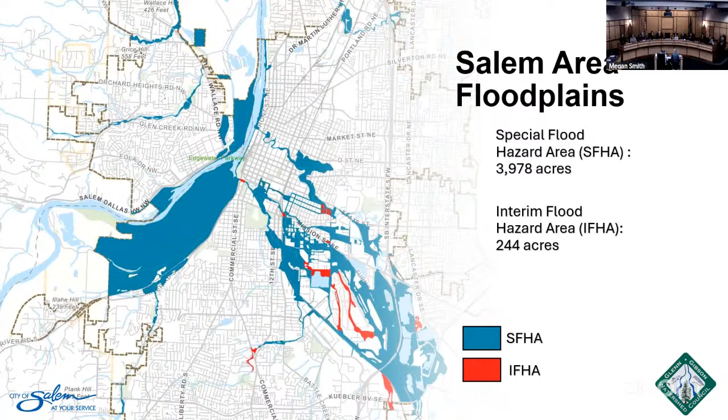We have a few additional IFHA study areas that are pending adoption. The majority of undeveloped SFHA is under public ownership within Minto Brown Island Park and Wallace Marine Park, equating to approximately 1,600 acres. We have approximately 800 acres of undeveloped land zoned for residential, mixed use, commercial, or industrial development.

All new development within the floodplain is required to obtain a floodplain development permit through the Development Services Division. These permits not only look at protection for structures, but also now require floodplain mitigation assessments that review development impacts to habitat for endangered species and to ensure those impacts are adequately mitigated.

When we talk about floodplains, we like to remind people that Salem has historically flooded over the years, and I've added some historical images here. The largest flood on the Willamette River of record was in 1861. The next significant flood occurred in 1890. In more recent years, we've seen flooding in the 1960s, 70s, 90s, 2012, and 2015.

In December of last year, we had an approximate 10-year flood event on Mill Creek, a flood event that has a 10% chance of occurring in any given year. This event impacted the State Street Corridor and the abutting residential neighborhood, though it was a relatively small event when you think about flooding in Salem holistically.

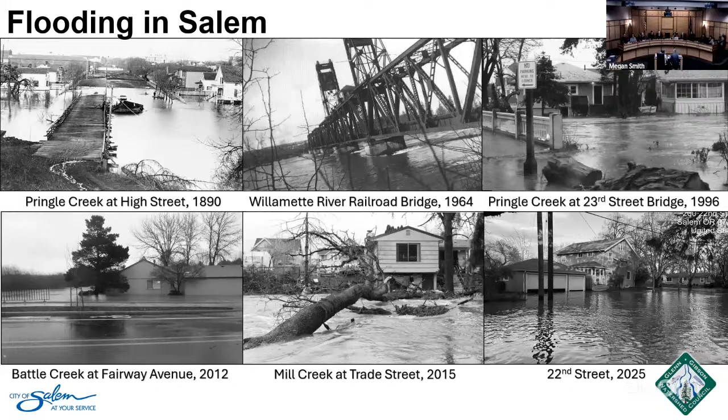Thank you very much, Laurel. I noticed that none of you are old enough to have experienced the 1964 flood. I was coming back from Corvallis at Oregon State University, and had to drive to Salem to cross the Willamette River to go east to Central Oregon where I lived.

So flooding does occur. It occurs naturally and occurs regularly. But there's a significant amount of adjustment following.

There's a recent lawsuit against the Federal Emergency Management Agency for not considering endangered species in the implementation of the National Flood Insurance Program. In Oregon, that lawsuit was started in 2009, dominantly by the Portland Audubon Society at the time, and there's been significant back and forth in the intervening years.

In 2010, the parties had a settlement agreement, and FEMA agreed to consult with the National Marine Fishery Service about the effects of implementing the National Flood Insurance Program and upgrade mapping, and look at the community rating system as it relates to encouragement or discouragement of development activity within floodplains.

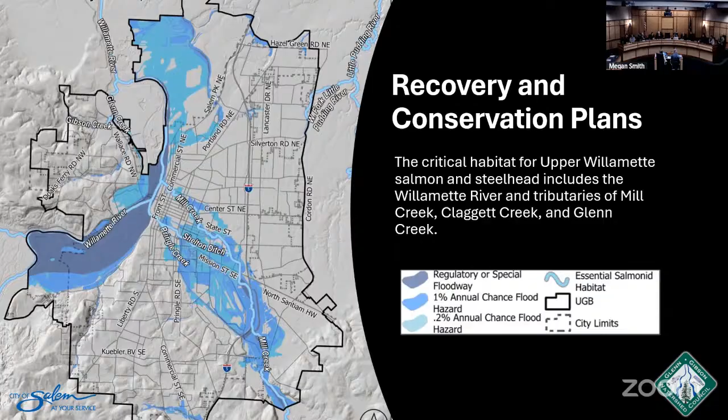It's important to recognize there's a broad variety of floodplain functions. Floodplains not only store water during high water times, but have a significant suite of functions - not just hazard reduction, but significant ecological values. Riparian forests are significantly important for a broad variety of aquatic and semi-aquatic animals and plants.

The functions that have been dominantly focused on through the regulatory process are flood storage, water quality, and vegetation. The focus on flood storage relates to loss of fish access, because when floodplains flood, juvenile fish utilize those areas, so they stay in place and don't get flushed out of the system - they feed in those areas. For water quality, the dominant effect is usually from impervious surfaces - that's one of the real struggles in urban areas, the dominance of impervious surfaces, so reducing that is really important.

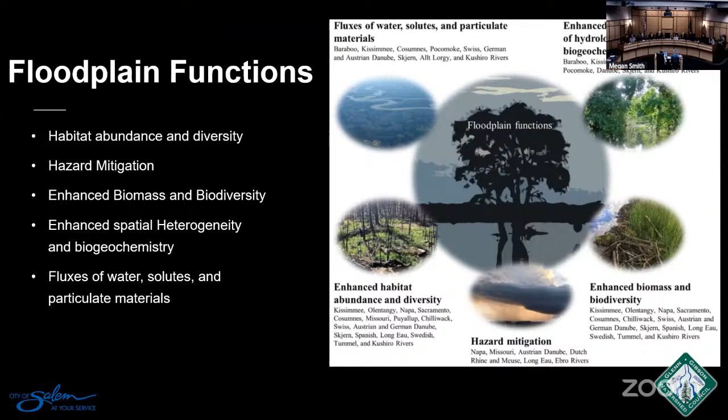And vegetation - there's a significant effort to maintain some sort of native cover on these floodplain habitats. So what we did was identify from significant literature a number of restoration activities, and if you look through the documents there's a whole variety of them, some of which the city is already doing.

The management of the Minto Conservation Area by replanting or reforesting the floodplain is one of the significant activities, particularly as the information about the number of acres in floodplain are dominated by Minto Brown Island. The reforestation that's occurred in that area is really important.

The control of Ludwigia, an invasive species in the backwater sloughs of Oxbow Slough and Willamette Slough - that's where the city cooperated with Willamette Riverkeeper to eliminate it - is an ongoing restoration activity.

The plan includes removal of barriers in Mill Creek, looking at removal of the dam on Penitentiary Ditch, looking at an alternative for Waller Dam where Mill Creek and Shelton Ditch interact, and looking at gravel pit reclamation for the possibility of creating habitat for northwestern pond turtle.

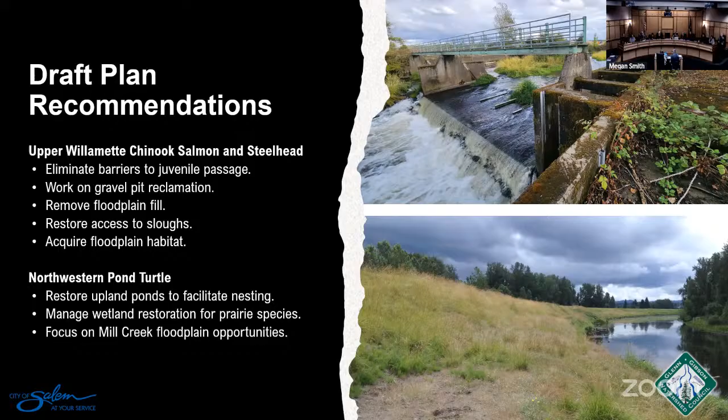So there's a list of a significant number of activities identified as ongoing, near term, and longer term, and we think they can have an effect on the species we're concerned with in the plan. I'll let Laurel finish as it relates to the floodplain management program that the city runs.

So briefly, I just wanted to talk on the city's floodplain management plan and program. We do have an adopted floodplain management plan that provides high-level guidance as to what a floodplain is, what its natural functions are, some of the history of flooding in Salem. It also provides action items for our floodplain management program.

It's reviewed annually and then goes through a full update every 5 years. We do have a floodplain management plan committee, and it goes through council annually and through those 5-year updates. Our most recent plan was adopted in 2023 and contains 43 total action items. They vary from very specific items that further protect people and structures, but also includes things like public information and messaging, stormwater standards to enhance water quality, and then other incentives for floodplain restoration.

There are 2 specific action items relating to the preparation of these plans specifically that we're talking about tonight. Those actions call for preparation of the floodplain species assessment and the natural floodplain functions plan in accordance with the CRS and federal guidance.

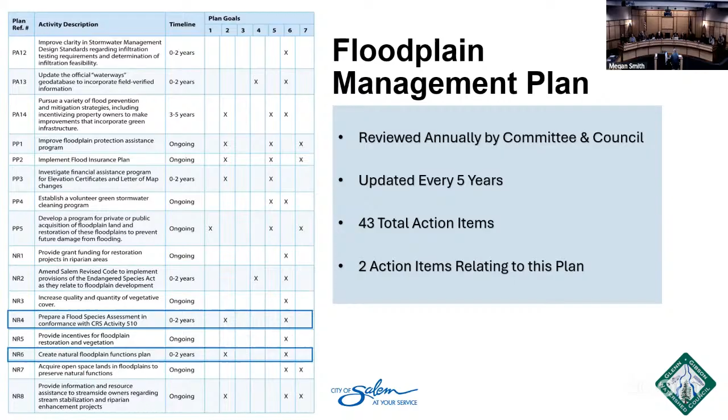And then I quickly wanted to talk about the community rating system program, which Ken and I have both mentioned. The CRS program is a voluntary program which the city is an active participant in. It recognizes and encourages community floodplain management activities that exceed national minimum standards. The CRS program recognizes the community's effort to reduce flood risk, facilitate accurate insurance ratings, promote awareness of flood risk and insurance requirements, and also the preservation of natural and beneficial floodplain functions.

I've listed a few examples here on the screen of management activities that the city currently receives credit for under this program. Based on all of the activities that we do annually, we have a Class 3 rating, which equates to a 35% discount on flood insurance premiums for FEMA-backed programs. In Oregon, Salem is the only Class 3 community, and across the country, there are fewer than 25 communities that have a Class 3 or higher rating.

So we always just like to put a little plug-in for the CRS program. It really reflects that our floodplain management program goes well above the minimum standards, and adoption and implementation of this plan will also be an activity that it's credited towards further discounts, potentially at our next annual verification visit.

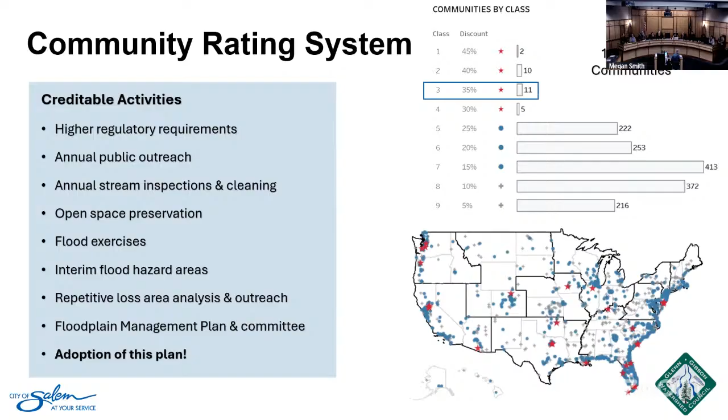Thank you for allowing us to present this evening. Ken and I can take any questions that you guys have.

Well, thank you for that. It was definitely a lot and interesting reading as we were preparing for tonight. And I know for myself, I'm very pleased that we're being proactive in taking these steps and pushing for the voluntary program. Any questions from the commissioners?

Commissioner Heller? Or not, well, I'll speak up.

Anyway, I wanted to thank you, and I've expanded my vocabulary from reading this. And it's excellent. It's just fascinating. And I just want to thank you for doing all this effort.

I will say most of the thanks should go to Ken. He was really instrumental in drafting this plan, and we really appreciate it.

This is actually a complex issue, and early on, as we were developing the floodplain assessment, we met with many of the neighborhood associations and tried to raise awareness and develop some brochures and tried to bring awareness to it. But that's hard to do in the summertime. People don't think about flooding in June and July and August, but we did have some receptive folks in the neighborhoods who were interested in at least finding out what the floodplains are and what the importance of floodplains is.

I thought there was something around 800 acres of undeveloped floodplain. And how does that 800 acres of floodplain... let's go back and look at the ownership of that first. We've discussed this a few times in the Planning Commission and recently heard testimony related to floodplains or other environmentally significant lands related to the 2014 buildable lands inventory. So I'm very interested, and I think the buildable lands inventory may be a little out of date at this point, but it'd be interesting to take a look at the overlap between those 800 undeveloped acres and the buildable land inventory. Do we have any ability to have that conversation?

I would not have that information tonight, but that's something we could come back with at some point. So it looks like we have something like 450 to 480 acres of residential land in the floodplain. And is that mostly... do we know about where that is? Do we have any kind of concept of what we're talking about?

No, I mean, like Ken was explaining, a lot of our floodplains are not even hydrologically connected to a water body. There are a lot of overland flow areas. To do that mapping exercise is not something that we have specifically, that I have tonight. Okay.

My thought is it's helpful to be able to understand when we're talking about really buildable lands for residential areas. Also, perhaps you can explain a little bit about hydrologically connected. So if we have a floodplain that's not hydrologically connected to a stream or a river, does that floodplain have the same value as one that is hydrologically connected? Perhaps if we can have that conversation, that would be helpful.

It would be my opinion that isolated areas that flood within the urban context often don't have the same value as those areas that are directly connected to some sort of stream or other water body. There are a few isolated wetlands that are important, but they're relatively few and far between within the urban context.

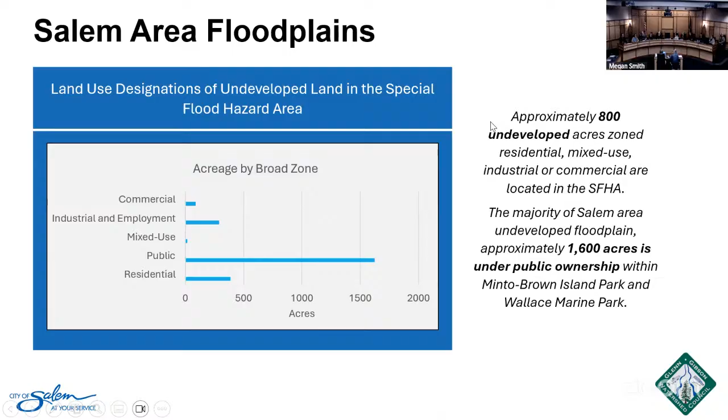My final comment is, how does the Oregon Conservation Strategy relate to this work? Oregon has identified a number of key species that aren't necessarily federally listed, but are species of importance for the state. One of the important things about these key species is that they are not yet endangered, so they don't have the same regulatory status, but they're indicator species. There's a greater opportunity to intervene at this point. Can you talk a little bit about how the Oregon Conservation Strategy relates to this discussion?

That's a very good point. The Oregon Conservation Strategy was adopted in December of last year, a few weeks ago. It includes the Willamette Valley, but it's very broad, and it's a scale issue. The species and threats they've identified are much more generic and a lot less specific than what was required for the development of a floodplain species plan.

So they focused more on, and you're correct, there are a broad range of species affected, but most of it's wet prairie species that have been affected by development, typically agricultural development, urban development, et cetera. So we did look at that. We did have Oregon Department of Fish and Wildlife review the document. They didn't have suggestions other than what we've adopted. But you're correct, the difficulty is scale.

They're looking at the entire Willamette Valley as an area. We're looking at a small subset of the Willamette Valley that is representative of a relatively minor portion, but a significant portion of the floodplain of the Willamette in the middle Willamette Reach. I don't know if that helps at all, but it covers it with a lot of words.

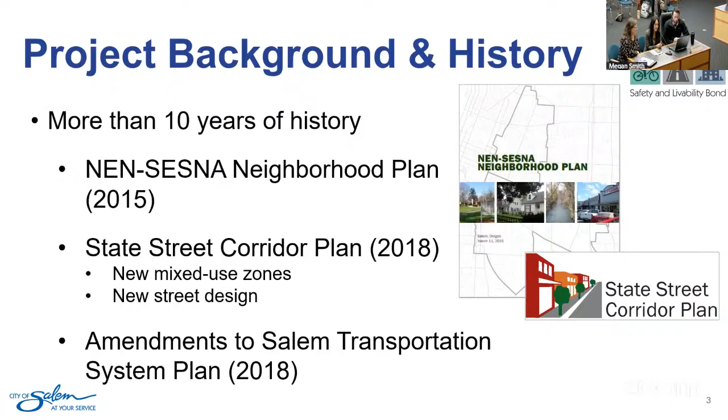Good evening. So once this was adopted into the plan, the first thing we needed to do was look for ways to implement, to fund different elements of it from the transportation side. We were fortunate to be able to apply for and receive funds for a number of spot improvements.

One was the 25th Street at State Street intersection. That project was just completed this summer. It included a new signal, an island for pedestrians, and reconfiguring that intersection.

The second is an enhanced pedestrian crossing, which will be constructed in 2026 on State Street by 21st Street. It will be one of the flashing beacon crossings.

Then, the focus of tonight is the 12th to 17th Street section, which was included in the 2022 Safety and Livability Bond Measure. That's the big project that we have funding for.

There's still more that will need to be done. Once this project is complete, we will have continuous bike connections all the way from West Salem to and through this corridor, connecting to 17th Street.

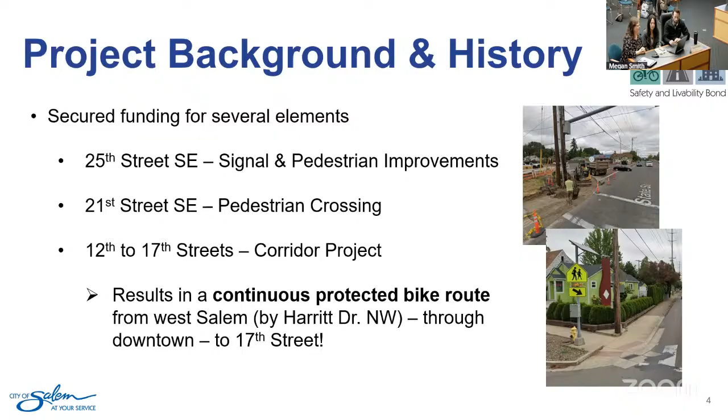This map here shows the entire corridor from 12th Street out to 25th Street. The portion on the west, from 12th to 17th, is the portion that Josh will be going into more detail on that we have funding for. The portion highlighted there in yellow, from 17th out to 25th, we do not have funding to make improvements to that section, with the exception of those two spot improvements I mentioned - one at 21st and one constructed last year at 25th.

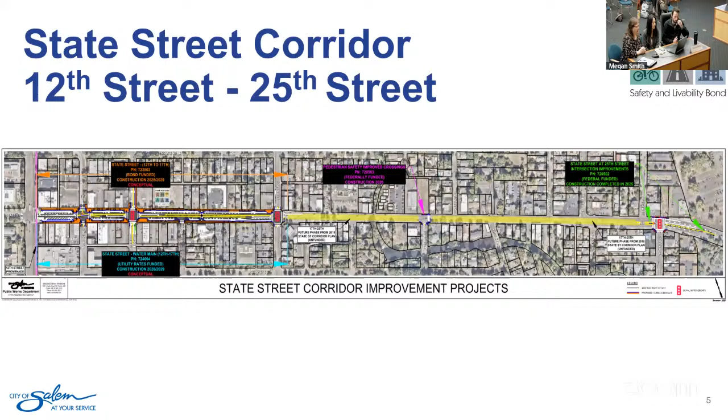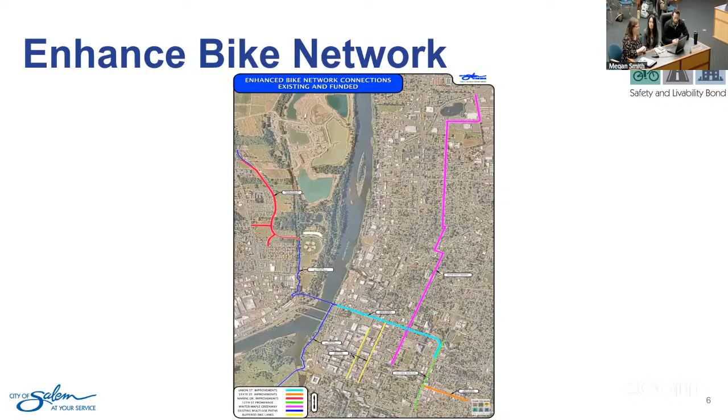Since the time we developed the State Street Corridor Plan, when we're doing these plans, we're at a pretty high, conceptual level. We're using GIS aerial imagery to try to figure out approximately how much right-of-way we have, where the buildings are, things like that.

Once we get money, we spend a little bit more time seeing how we can refine and improve the plan. So the plan that Josh will be talking about today includes - we found a way to add bike lanes in the section between 12th and 13th Street that had not been included in the original 2018 plan. We also were able to figure out how we could switch parking and the bike lanes to add additional protection to people using those bike lanes.

The 17th Street intersection - we have made some modifications to minimize property impacts and property acquisition needs. And then, of course, we have Americans with Disability Act compliance and stormwater compliance that needs to be incorporated, and water line replacement. That's not funded by the bond, but when you're going to be tearing up a street, you want to make sure the utilities underground are in decent shape, and I guess the water line is not.

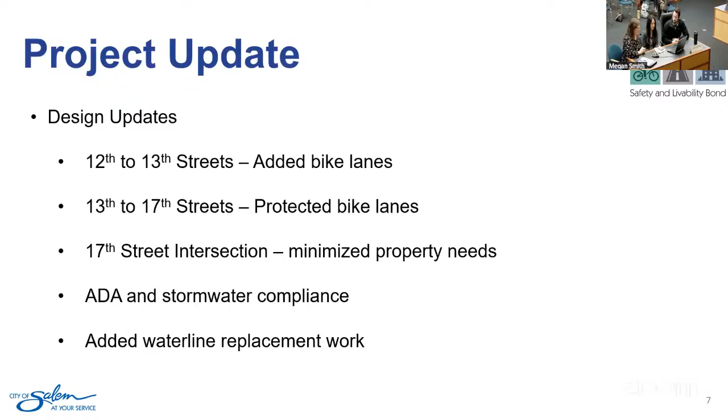So the goal of this project, as stated, is to create a vibrant walkable corridor with a focus on safety for all users. Currently, this is a pretty vehicle-heavy section, so we're trying to add some more focus on pedestrians and bikes.

The budget for this project is about $15 million. Most of that money comes from the 2022 Safety and Livability Bond. A smaller portion, about $2 million, comes from the utility rates, and that's to fund the water line replacement. We began design in late 2024. One of the first things we did was hire our design consultant, HHPR, and we expect construction in '28 and '29.

So project scope, there's way more going on here than would fit on this slide, but these are the big ticket items. This is a full street improvement project, so basically everything within the project limits between 12th and 17th, we're going to be touching and replacing. That's resurfacing the existing pavement. We're going to be reconfiguring the travel lanes, new sidewalks, curbs, and gutters. We're going to be adding bike lanes, updating the ADA ramps and push buttons, putting in some new crossings for pedestrians. We have signal improvements at 14th and 17th Street. And then, as we said, the new water line, we're going to be upsizing.

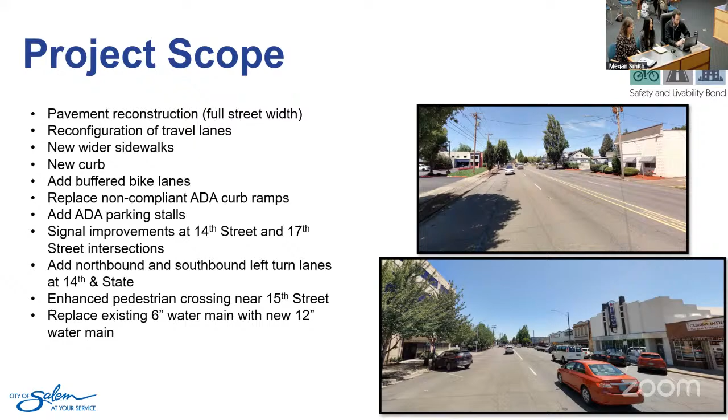So this is the same map that's over there and that was handed out. It's kind of hard to read all of the text on it, but wanted to give a sense of the project size and what we're doing. You can see the new striping layout. Everything that's black hatched, that's going to be all the new pavement. All of the gray and yellow hatches around the borders, that's where we're putting in the new sidewalks and furnishing areas. One thing to note, currently at that 12th Street intersection, there are 3 travel lanes that come across that intersection.

We're going to make one of those lanes a right turn only, so that we only bring 2 lanes across at that intersection, and that helps us add bike lanes in that 12th to 13th Street section, and take out a conflict where we're trying to merge lanes down to 1 lane to continue down State Street, but also have people backing out of those parking spaces there.

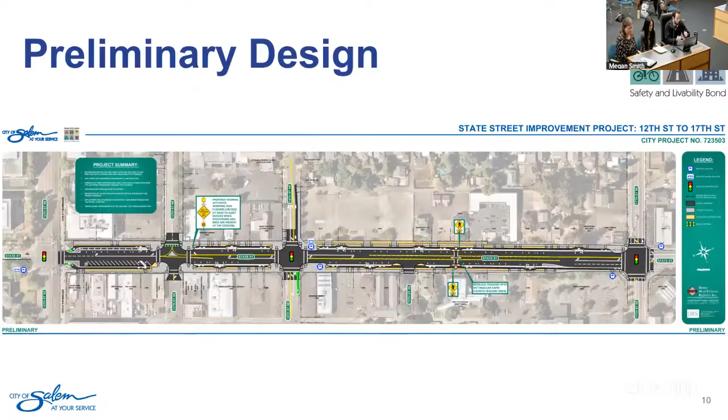So vehicle elements, what does this look like if you're driving through the area after it's all done? Like I said, pavement reconstruction, we'll have a new smooth road there. The big piece that we're doing is reconfiguring all the travel lanes. Currently, most of this is a 4-lane section, so there's 2 travel lanes in each direction.

A good example of where we've done this before is on Broadway, between Pine Street and the Parkway. As you can see in the before picture there, there's a 4-lane section, 2 travel lanes each way. When we put the striping back, we put 3 travel lanes in, 1 travel lane in each direction with a center turn lane. This gives us the ability to add bike lanes.

It also takes out a lot of conflicts with the vehicles. In the 4-lane section, you often get people sitting in that left lane, waiting to turn left. That leads to rear end accidents and sideswipe accidents if someone's tired of waiting and they dive around a car. It also gives left turning vehicles on or off of State Street a refuge space to turn to, so they can do a 2-stage turn movement.

We're going to be doing signal improvements at the 14th Street intersection and the 17th Street intersection. And then at the 14th Street intersection, we're going to be adding dedicated left turn lanes on both the north and southbound leg of that intersection.

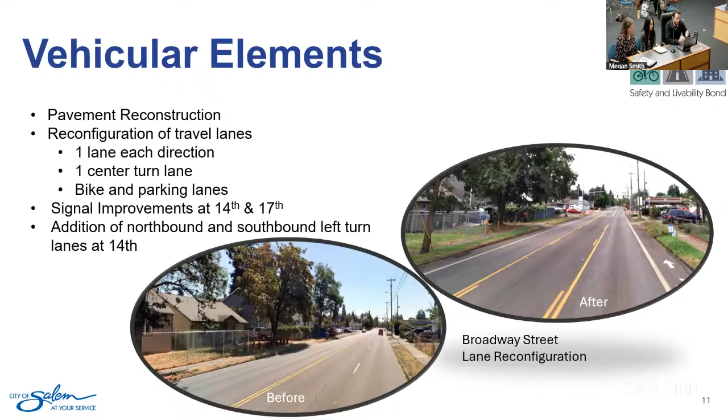For bikes, currently we don't have any bike facilities on this section of State Street, so it's probably pretty scary to ride a bike there. We're going to be putting in buffered bike lanes with a 5.5-foot bike lane, 2-foot buffer. One unique thing we're going to be doing on this one is the bike lane is going to be on the curb side rather than on the travel lane side.

An example of that is on Union Street. As you can see in that picture, we have the travel lane, then the parking lane, then the buffered bike lane, and then the sidewalks. This project will tie into Union Street, keeping a consistent bike lane through there. That also adds more protection for bikers because the parked cars can act as an extra buffer, and it takes out the conflict of vehicles having to cross that bike lane to get in or out of parking stalls.

Also for the bikes, we're going to be putting in a flashing warning sign at the 13th Street intersection. That's where we have the east and westbound traffic that come together and merge onto the one-way, and that's a unique movement. So we're just bringing extra attention to the bikes that would be crossing through there.

At the 14th Street intersection, we're going to be putting in a bike box. We have an example here from Liberty and Trade from the 2024 pavement R&R project. At that intersection on the south side, it's a shared use lane, but it's really wide, so there's room for vehicles and bikes to ride next to each other. On the north side, it narrows down to about 11 or 12-foot shared use lane. This gives bikes an opportunity at a red light to get in front of the vehicles rather than having to merge in the intersection.

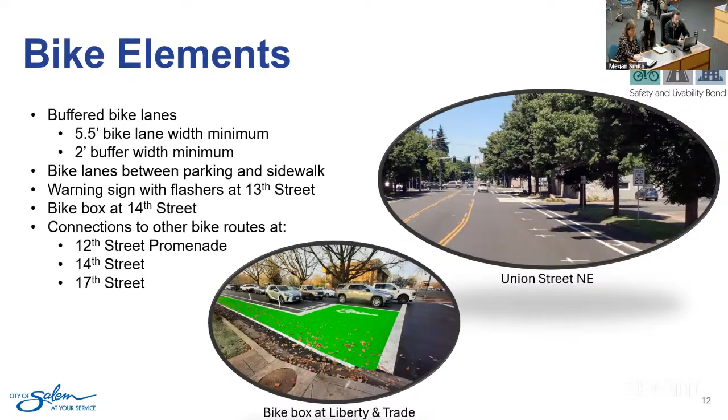And then, like we pointed out, all of the major intersections along this corridor now will connect to a different bike route.

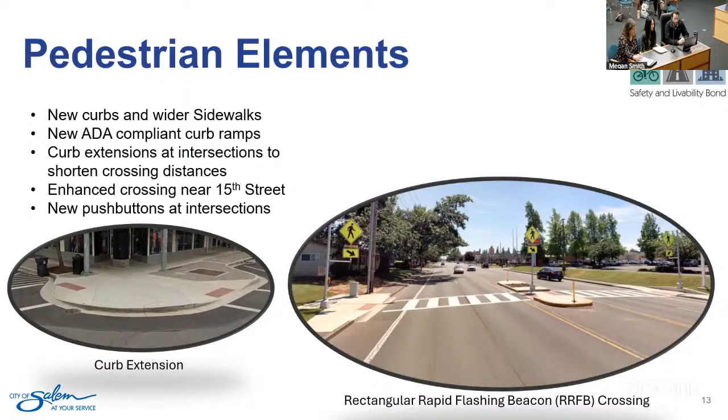And then we have that, what we're calling a furnishing zone. That's kind of a mix of landscape and hardscape. We know some of that landscape area is going to be filled with stormwater facilities. We're going to try and put street trees in where we can. But then there's also the hardscape area where the intent would be we could put street furniture, whether that's bike racks, benches, or decorative street lighting. There may be utilities that have to go in there. We're still pretty early on in design, so we don't know how all these pieces fit together yet, but this is kind of the visual feel that we're going for at the end of the day.

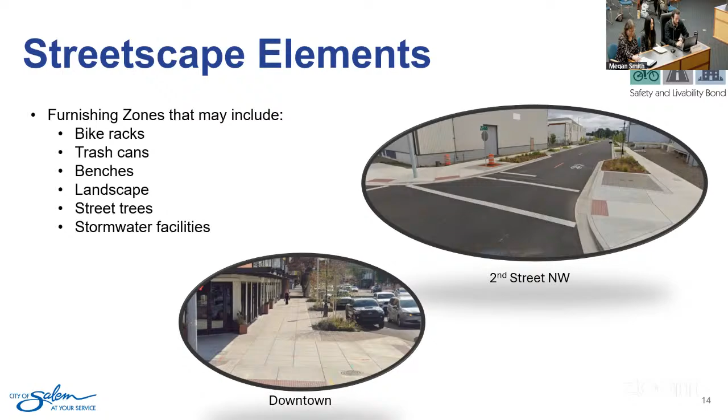Next steps for the project: we're going to continue design. That's going to take us a couple more years. We have to get to 30%, maybe even 60% on some of this stuff, and then we can begin a lot of our right-of-way and easement acquisition and coordination. There's a ton of utilities out here, so we're going to have a lot of coordination effort with all the utility companies, determining what needs to be relocated and where things need to go.